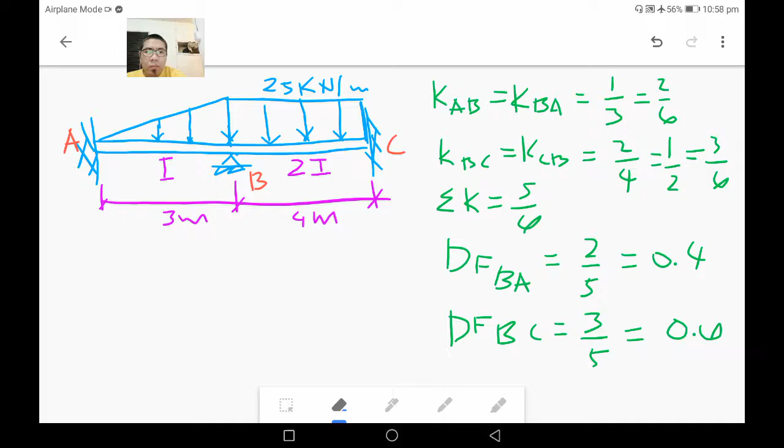Dito joint, member, ito yung distribution factor, ito yung fixed end moment. Mukhang hindi siya kakasya, pero kakasya naman siguro. So pwede nating ilipat. Anyway, na-identify naman natin yung distribution factor, burahin na natin para makagawa tayo ng table.

So for the table, this is joint, this is member, this is distribution factor, and this is fixed end moment. For joint A, ang member lang sa joint A is AB. Yun lang naman nakakabit sa kanya. Medyo lakihan natin para kasya yung mga figures mamaya.

Then sa joint B, ang member sa joint B is BA and BC. Dalawa. And for C, member lang sa C is CB.

For the distribution factor, ang BA natin kanina, sabi natin 0.4, and this is 0.6. Pag pin sa dulo, 1. Pag roller sa dulo, 1. But hindi naman to pin or roller, this is fixed. Pag fixed naman, 0 yung distribution factor.

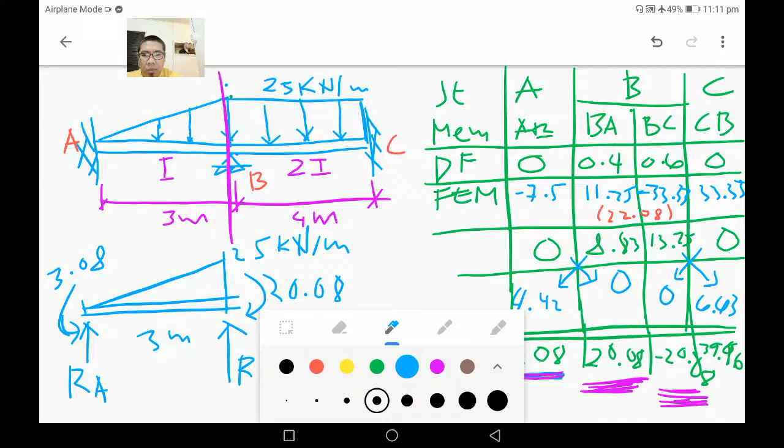And this is 20.08. And we have load 25 kilonewton per meter. Okay. So, this is RB. Of course, kung meron ka na yan, sum ka ng moment dito sa B, makuha mo na yung RA.

So, let us sum the moment. Tandaan natin itong na-compute natin. Burahin na natin to para ma-solve natin yung mga reactions. So, sum natin yung moment. Summation of moment at B equals 0. Method of section yan, kinat natin.

So, clockwise is RA times 3. Isa pang clockwise is yung 20.08, so plus 20.08. Moment na yan, baka lagyan nyo pa ng moment arm. So, minus 3.08. Yung rotation ng 25 kilonewton per meter is also counterclockwise sa B. So, that is minus 1/2, triangle yan, times 25 times 3, and then the moment arm is 1. Then that is equals 0.

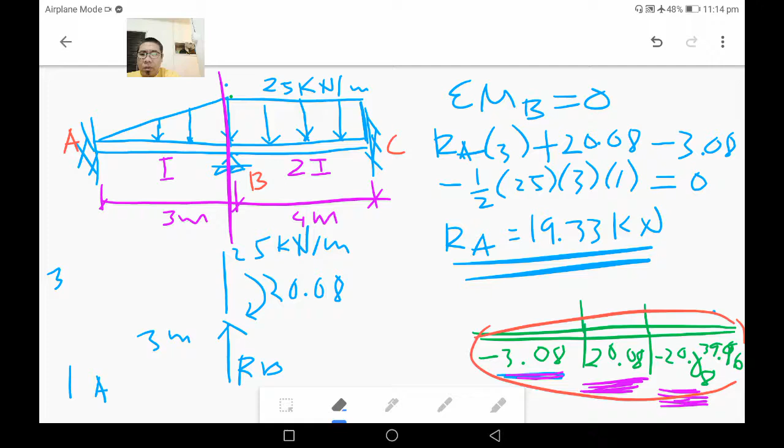So, therefore, the value of RA is 19.33 kilonewton. Now, for the value of RB. Tandaan natin, yung ating RA is 19.33. Then for the value of RB, hindi natin masolve yung RB directly, so solve muna natin yung RC.

Okay, so this is 25 kilonewton per meter, and we have here the RB at may moment dito na 20.08.

Yung galing doon sa ginawa natin kanina. And we have here the RC at may moment din dito na nakuha natin, that is 39.96, and the distance is 4 meter. So kung present mga yan, so this is 39, no? Kung present mga yan, masosolve na natin yung RC.

So RC, so saan tayo mag-moment? Sa B pa rin, no? Sa B pa rin tayo kasi RC yung gusto natin makuha eh. So summation of moment sa B, so ang clockwise dyan is 39, no? So pwede natin sabihin clockwise equals counterclockwise. So ang mga clockwise is 39.96. And then plus 25 times 4 times 2. Mga clockwise yan. Then equals natin sa counterclockwise. Ang counterclockwise natin is RC times 4.

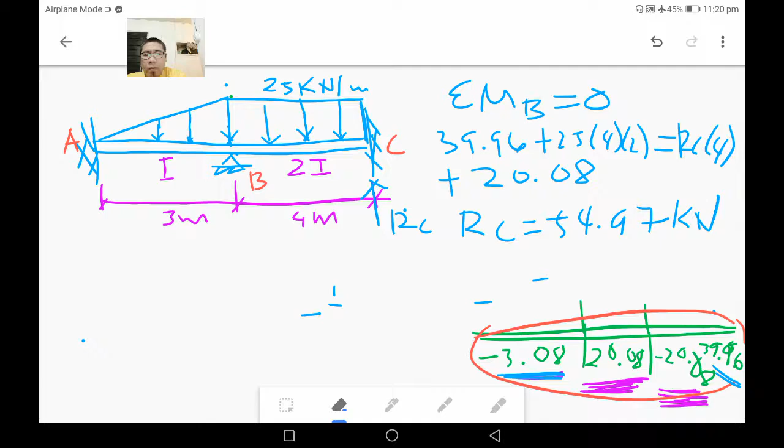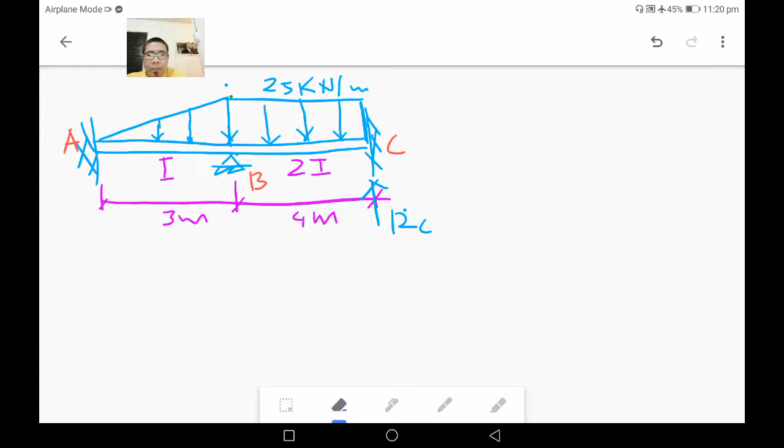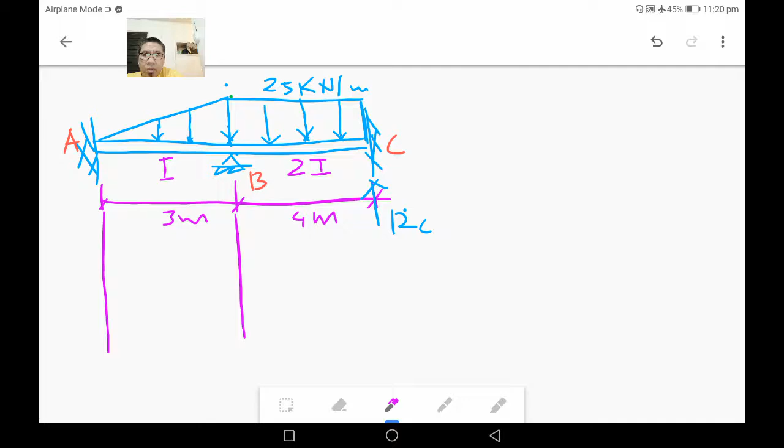So kung kompleto na tayo, makapag-draw na tayo ng shear and moment diagram. So burahin muna natin to para ma-draw na natin yung moment and shear diagram. Okay, clear natin yung screen muna natin. Then sa pag-draw ng shear and moment diagram, pwede tayong area method, but remember na pag nag-trapezoid, hindi na applicable yung area method. Okay? So this is for the shear.

Okay. So sabi natin, meron tayong reaction dito na 19.33. So this is 19.33. 19.33 minus 1/2 times 3 times 25, and that is negative 18.17. Okay, then negative 18.17, plus natin yung RB, which is 63.2. So therefore that is 45.03. So this is 45.03.

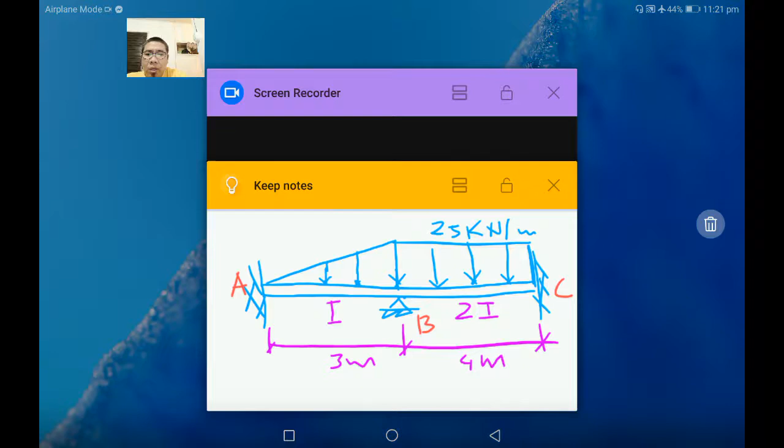Itapat nyo ang numero nyo, no? Hindi yung dito yung 19, dito mo sulat yung 19. Mali yun. So dapat intindihin yung diagram na ginagawa nyo, no? So okay, this is 45.03. 45.03 minus 100. 100 kasi 25 times 4. And that is negative 54.97. Okay. And next is let us draw the moment diagram.

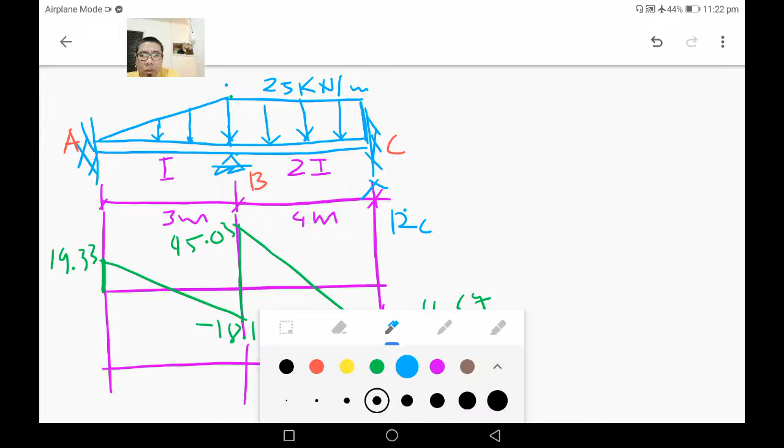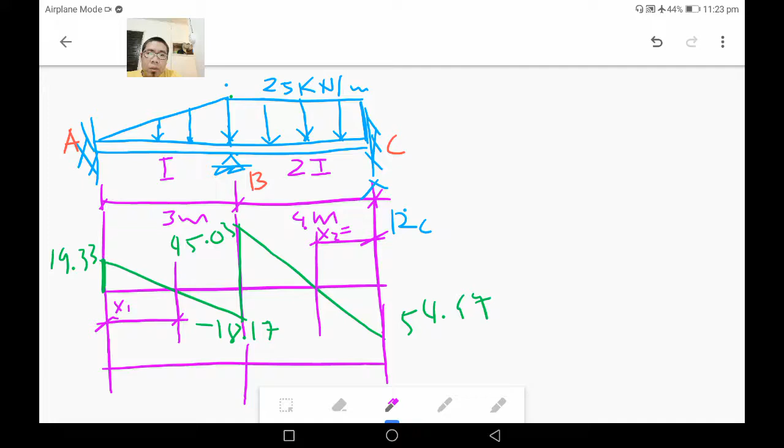Kasya pa yan. Okay. So this is the moment diagram. Then for the moment diagram, kailangan natin alamin yung mga values na to. This one at saka ito. So ano yung values niyan? X1, and tawagin natin itong X2. Ano kaya value ng mga yan? Ito sa X2 mas madali, no? So for the X2, X2 is

54.97 divided by 25. And I think that is 2.2. This is 2.2 meters. If that is 2.2, this is 1.8 meter. No? Then next nating problema is yung value ng x1. For the value of x1, magre-ratio and proportion tayo.

Kakat natin to. Ang mangyari dyan, kakat natin siya somewhere dito, kung saan tumama yung x na yan. Di ba? This is x. Kung x yan, ano magiging itsura niyan? So parang kinat mo siya dyan. This is x. And then you have here the value of 19.33. This is the value niya, that is 54.97.

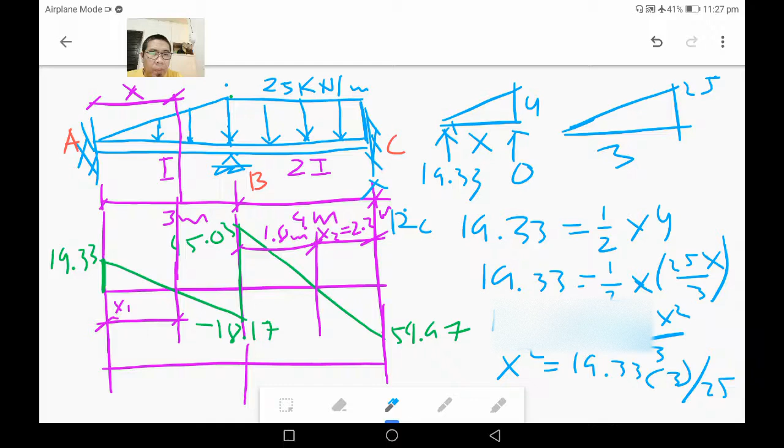No? So, therefore, x squared is 19.33 times 3 times 2 divided by 25. So, therefore, x is 2.15 meters. So, this x is 2.15 meters. Okay, so pag nakuha na natin yung distance, pwede na tayo mag area method. So, area 1. Ito, hindi na natin pwedeng ma-area method kasi this one is trapezoid. Kaya hindi natin pwedeng gamitin. So, ito na lang area 2 and area 3.

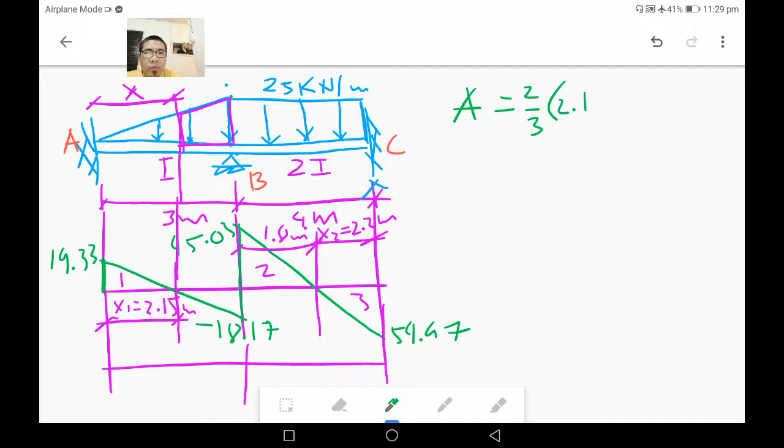And then, for the area method, computin natin yung mga areas. 2.2 meter. Then, for the area 1, ano yung area 1? 2/3 B, 2.15, and height niya ay 19. Oh, sorry, this is curve, no? Ano pala sa taas niya? This is not straight line. This is curve. So, hindi na siya itsurang curve. Dapat tatawid siya dyan sa X. Then, na-modify natin na lang yung distance X.

Oops, nabura. Okay. Then, modify natin yung distance. That is X. And then, since curve yan, area niya is 2/3, 19.33. And the area 1 is 27.71 kilonewton meter. And the area 2, that is 1/2, 1.8, 45.03. And the value of area 2 is 40.527 kilonewton meter. And for area 3, that is negative.

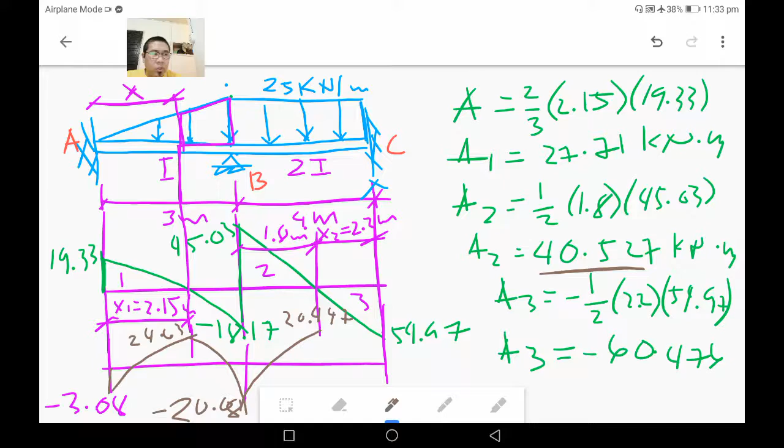This is 20.08. And 20.08, negative yan. Sa ilalim yan. Then, i-plus mo yung area 2 na 40.527. So, ang moment dito ay 20.447. And 20.447 minus 60.467, somewhere in 40.02 yon. Napakaliit niyan para magkaroon ng discrepancy, na 39.96. Sa ilalim na siya. Ang susundin mo yung na-solve natin kanina. So ngayon, nagawa na natin yung shear and moment diagram.

So, this is moment diagram. Ang interested tayo is the maximum moment. And this is the shear diagram. So for the beam BC, the maximum moment is 39.96. That is negative. And for beam AB, the maximum moment is 20.08, negative din. So kung negative yan, ganito yung curve ng beam niyan pag sa actual. Yan yung curvature ng beam, exaggerated.

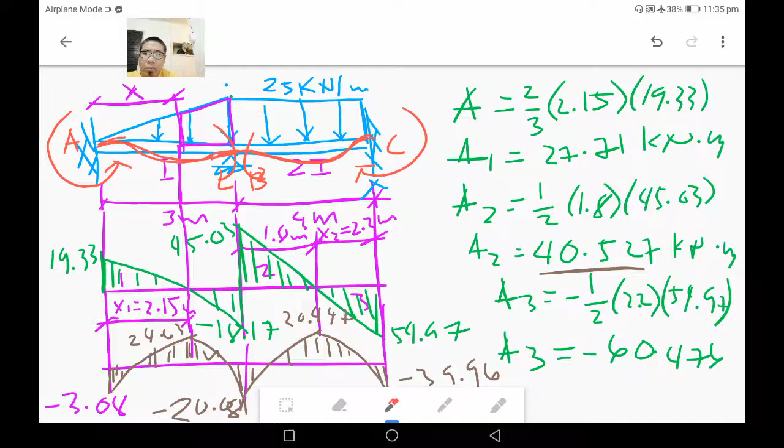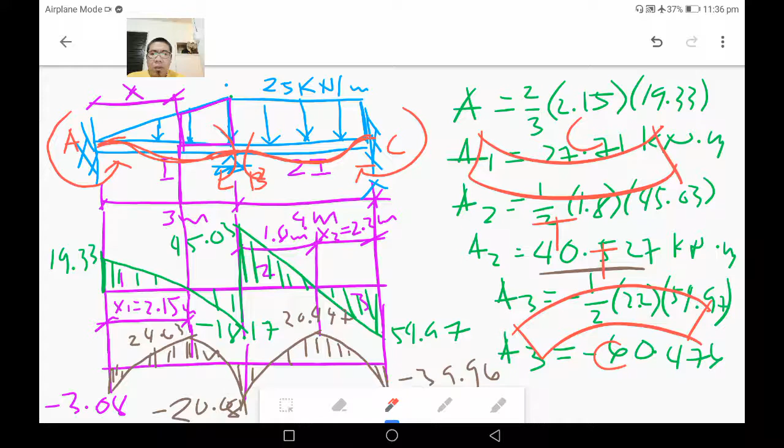Kaya kung mapapansin nyo yung compression, kung saan nagtuturo yung moment. Compression dito. Ito banda dito, tension yung ilalim. Dito tension, dito yung compression. Sa reinforced concrete, importante na ma-identify mo where is compression side and where is tension side. Ang tawag natin dito flexure, kasi kalahati tension, kalahati compression. Kaya tawag natin sa kanila ay flexural stress. Okay?